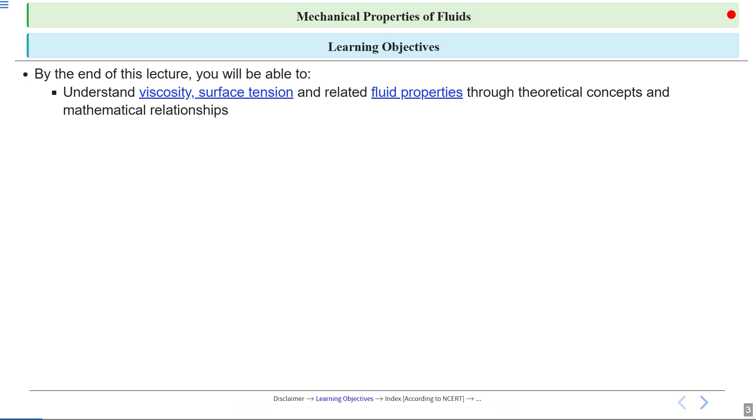Learning objectives. By the end of this lecture, you will be able to understand viscosity, surface tension, and related fluid properties through theoretical concepts and mathematical relationships, and apply principles of fluid mechanics to analyze real world examples like capillary action, droplet formation, and fluid flow in pipes.

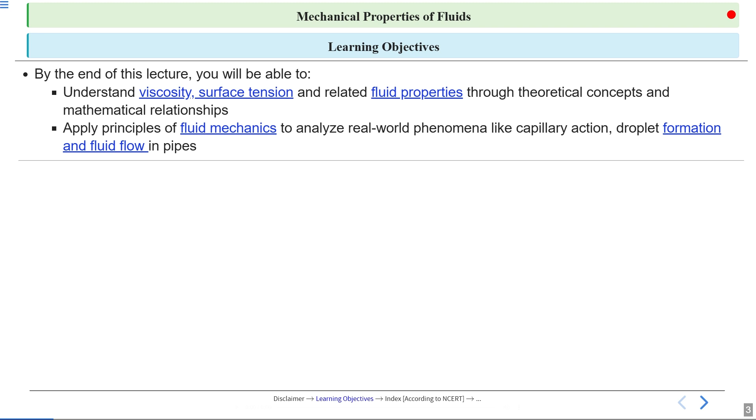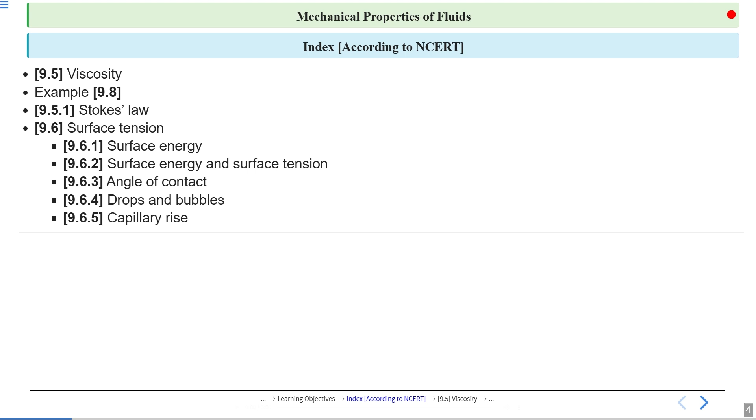So students, in today's lecture, we will cover first 9.5 viscosity, then example 9.8, then 9.5.1 Stokes law, then 9.6 surface tension, 9.6.1 surface energy, then surface energy and surface tension, then 9.6.3 angle of contact, then 9.6.4 drops and bubbles, and last 9.6.5 capillary rise.

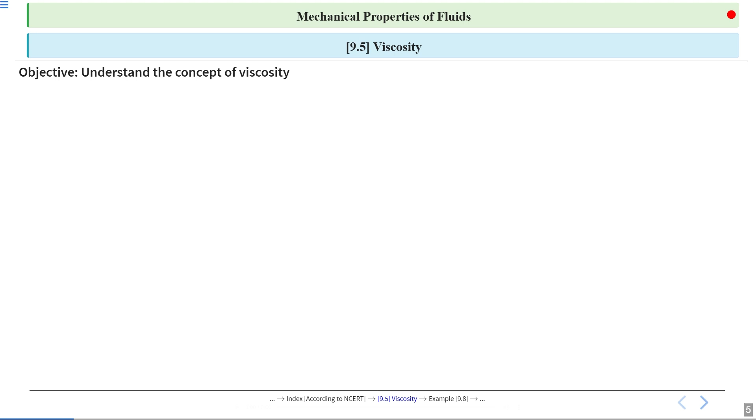So students, let's start with viscosity. Viscosity is a fundamental property of fluids that measures their resistance to flow. Viscosity arises when there is relative motion between layers of fluid.

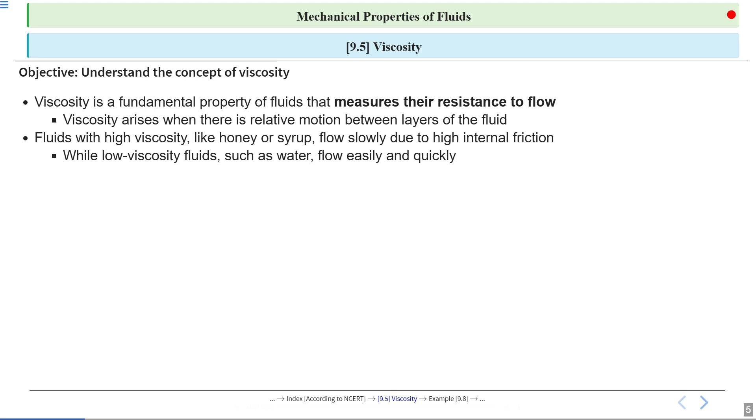It means viscosity measures a fluid's resistance to flow, arising when there is relative motion between layers of fluids. Fluids with high viscosity like honey or syrup flow slowly due to high internal friction, while low viscosity fluids such as water flow easily and quickly. This internal friction arises from the fluid's molecular structure and how its layers move relative to each other when subjected to stress.

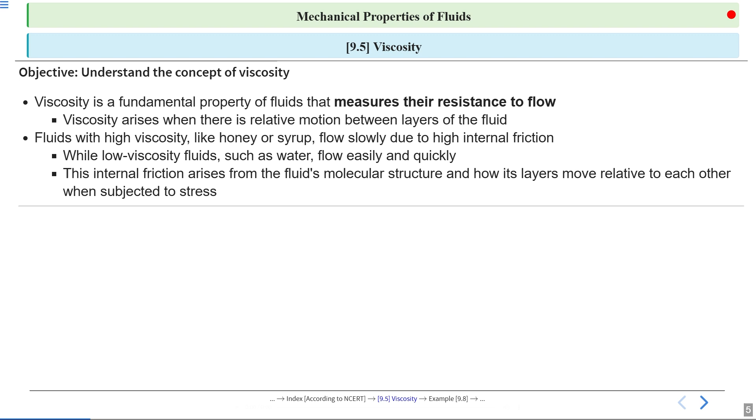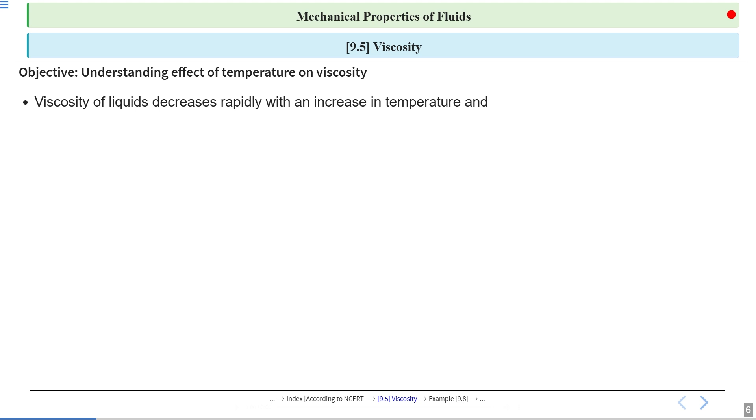Students, now we are going to focus on how temperature affects the viscosity of fluids. We know viscosity is a measure of how much a fluid resists flowing. First, viscosity of liquids decreases rapidly with an increase in temperature. This means that when you heat a liquid like warming up honey, it flows much more easily. The molecules move faster and can slide past each other more easily, so the liquid becomes less thick.

Viscosity of gases increases with an increase in temperature. As gas molecules move faster, they collide more often, which increases the internal friction and makes the gas slightly more resistant to flow. For example, warm air is just a bit more viscous than cold air. So, heating a liquid makes it flow more easily, but heating a gas makes it flow a bit more slowly. This difference is important in real world situations like engine oils or airflow in ventilation systems. Remember, temperature affects liquids and gases in opposite ways when it comes to viscosity.

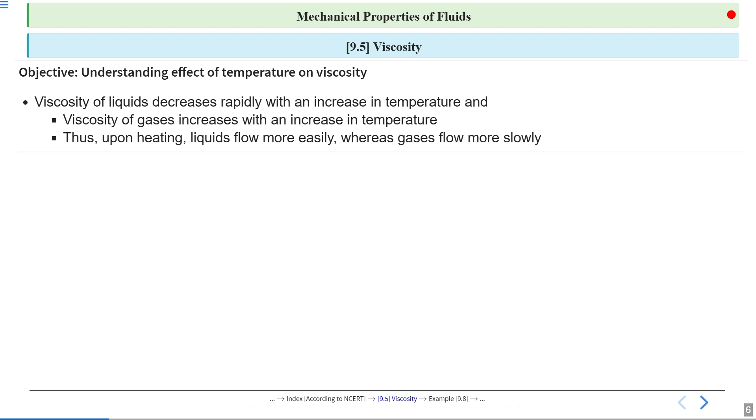Now we will discuss how viscosity affects fluid flow and behavior. Let's consider a simple setup. Imagine a layer of oil trapped between two glass plates, as shown in figure 9.12. A layer of liquid sandwiched between two parallel glass plates, in which the lower plate is fixed and the upper one is moving to the right with velocity v.

So the lower plate is fixed in place, while the upper plate can move. This setup helps us visualize how the fluid behaves when a force is applied. Here, the oil is sandwiched between the plates. This is a classic way to study viscosity.

Now, focus on what happens when we move the top plate to the right at a constant speed, while the bottom plate still stays still. The oil in contact with the moving plate tries to move along with it, while the oil near the fixed plate stays put. This creates a velocity difference within the fluid, which is exactly what viscosity acts to resist.

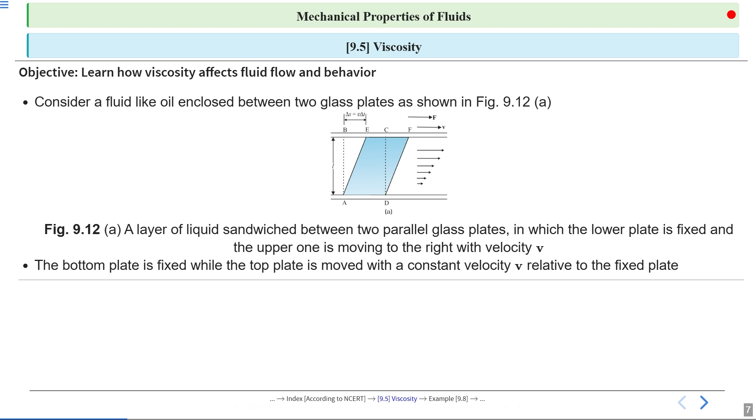So, imagine you have a plate moving over a layer of oil and then you replace the oil with honey. You will notice that you need to push much harder to move the plate at the same speed when using honey. This is a direct observation of how different fluids resist motion.

So this tells us that honey is more viscous than oil. In other words, honey has a higher viscosity, which means it resists flow more strongly. Viscosity is a key property that determines how thick or sticky a fluid feels when you try to move something through it.

So the fluid that touches a surface actually moves at the same speed as that surface. This is called the no slip condition. For example, if the bottom surface is fixed, the fluid touching it does not move at all, while the fluid touching a moving plate moves with the plate.

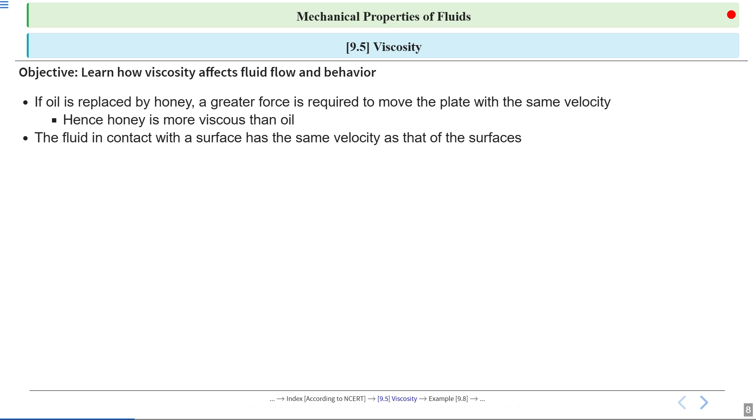So the layer of liquid in contact with the top moving surface travels at a velocity v, while the layer touching the fixed bottom surface stays still. This creates a gradient of velocities from the bottom to the top. It's important to remember that the velocity changes smoothly from one layer to the next.

If we look at all the layers in between, their velocity increases evenly from 0 at the bottom to v at the top. This means each layer moves a bit faster than the one below it. This gradual change in velocity across the fluid is a key feature of viscous flow.

For any layer of fluid, the layer above it tries to drag it forward, while the layer below tries to slow it down. This tug of war between layers creates an internal friction or viscous force within the fluid. It's this internal friction that we measure as viscosity.

This internal friction results in a force between the layers. The upper layer pulls the lower one forward and the lower layer pulls the upper one back. This is why moving one layer affects the motion of the others, and why more viscous fluids are harder to move. This type of flow is known as laminar.

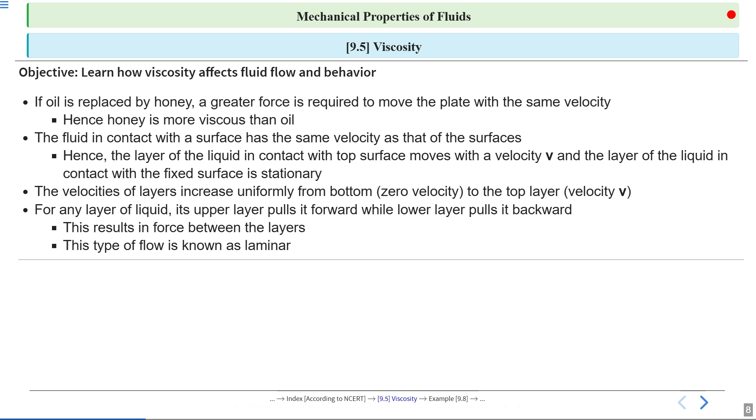Now, coefficient of viscosity. Let's start by defining the coefficient of viscosity. It's often represented by the Greek letter eta. The coefficient of viscosity is the ratio of the shearing stress applied to a fluid to the rate at which the fluid is deformed, or the strain rate. In simple terms, it tells us how much force is needed to make a fluid flow at a certain rate.

Now, eta equal to, mathematically, force upon area divided by velocity upon L, which is equal to, when rearranging the terms, eta equal to FL divided by VA. And if we talk about the SI units, so it will be...

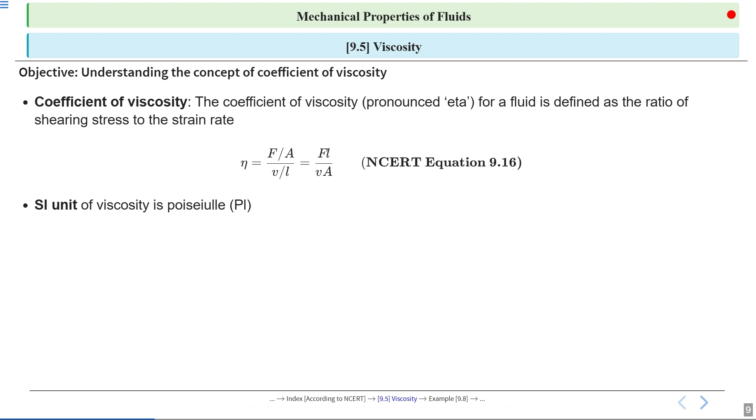This unit is not commonly used in everyday situations, but it's important to know for scientific work. Its other unit is Pascal second. These are equivalent ways to express viscosity in SI systems.

Dimensional formula: M L inverse T inverse. This tells us how viscosity relates to the fundamental physical quantities of mass, length, and time. Understanding dimensions helps us check if our equations make sense and can be useful for unit conversions.

Generally, thin liquids like water, alcohol, etc. are less viscous than thick liquids like coal tar, blood, glycerine, etc. This difference is why honey pours slowly while water pours quickly.

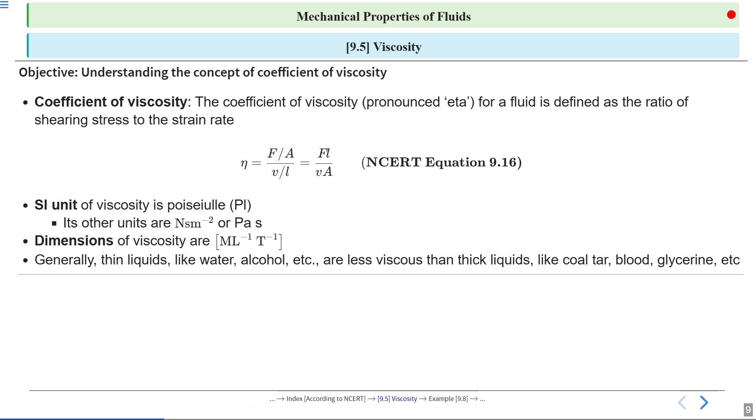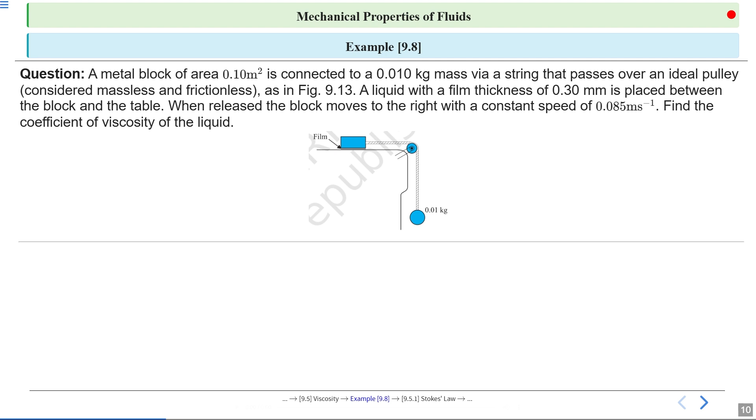Example 9.8. A metal block of area 0.10 meter square is connected to a 0.010 kg mass via a string that passes over an ideal pulley, considered massless and frictionless, as shown in the figure. A liquid with a film thickness of 0.30 mm is placed between the block and the table. When released, the block moves to the right with a constant speed of 0.085 meter per second. Find the coefficient of viscosity of the liquid.

Alright, let's see the solution. Let's start by listing all the information given in the problem.

Area of metal block A equal to 0.10 meter square. Mass connected to string M equal to 0.010 kg. Film thickness H equal to 0.30 mm, which is equal to 3.0 into 10 raised to the power minus 4 meter. Constant velocity V equal to 0.085 meter per second. Acceleration due to gravity 9.8 meter per second square.

Now, first let's think about why the block moves to the right. It's because the tension in the string caused by the hanging mass pulls the block. This tension is what initiates the motion, and since the block moves at a constant speed, the forces must be balanced.

So the tension, which we call T, is equal in magnitude to the weight of the hanging mass. Remember, weight is just mass times acceleration due to gravity. So T equal to M into G. Thus, the shear force F equal to T is equal to mg.

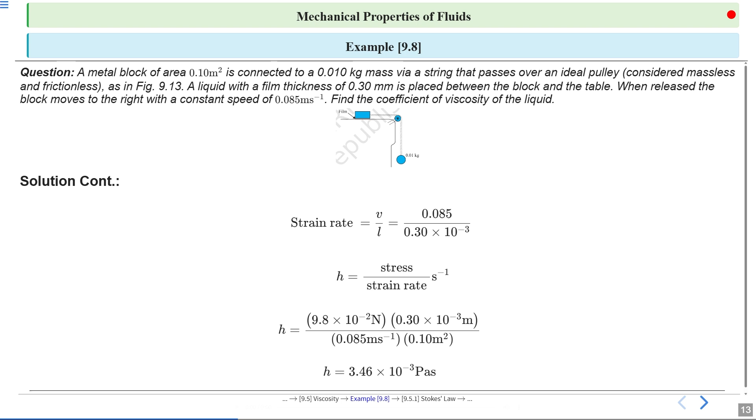Now let's look at Stokes' law. This law tells us about the viscous drag force, which is the resistance a small round object feels when moving through a thick fluid. This drag force depends on three things: the radius of the sphere, the viscosity of the fluid, and how fast the sphere is moving.

Think of how it's harder to move your hand quickly through honey than through water. Mathematically, F equals 6 pi eta a V. Viscous drag force F depends on fluid viscosity eta and sphere radius a.

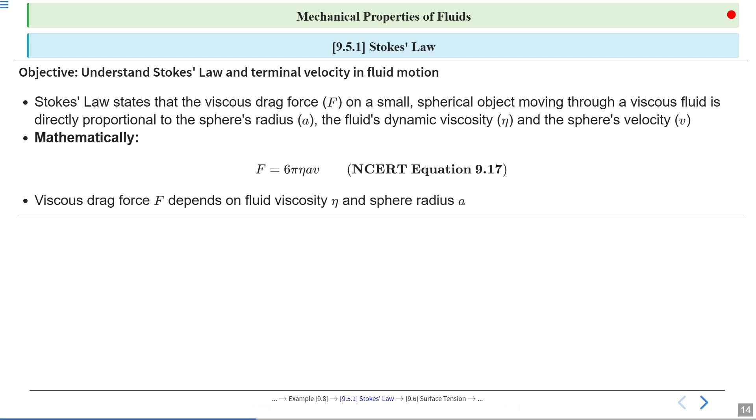Now let's consider a falling raindrop. This is a great real world example to visualize how forces act on an object moving through a fluid like air. At first, the raindrop accelerates downwards due to gravity, pulling it towards the earth, just like any other object in free fall. This initial acceleration is similar to dropping a stone from a height.

Velocity increase leads to increased retarding force. This force is called viscous drag, and it increases as the velocity of the raindrop increases. When viscous force plus buoyant force equals gravitational force, acceleration becomes zero. When this balance is reached, the raindrop moves at a constant speed called terminal velocity, meaning it continues to fall but its speed does not increase further. Terminal velocity is important because it explains why raindrops don't become dangerous projectiles as they fall.

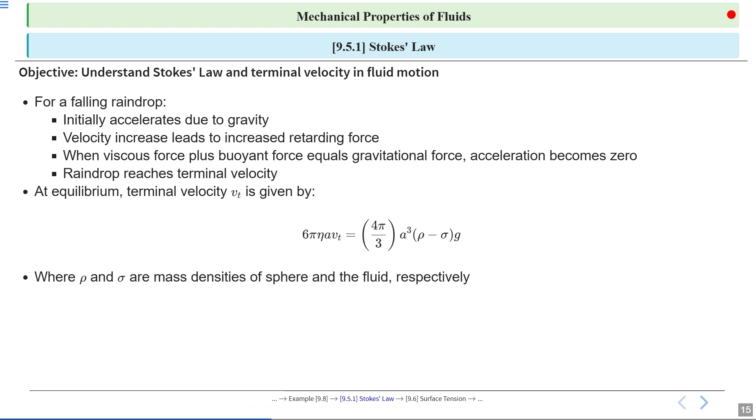At equilibrium, we can calculate the terminal velocity using a specific formula: 6 pi eta a Vt equals 4 pi divided by 3, a cube, into (rho minus sigma) into g, where rho and sigma are the mass densities of the sphere and the fluid respectively. So Vt equals 2 a square into (rho minus sigma) into g, divided by 9 eta.

Terminal velocity depends on: first, the square of the sphere's radius; inversely on fluid viscosity; and the difference in densities between the sphere and the fluid.

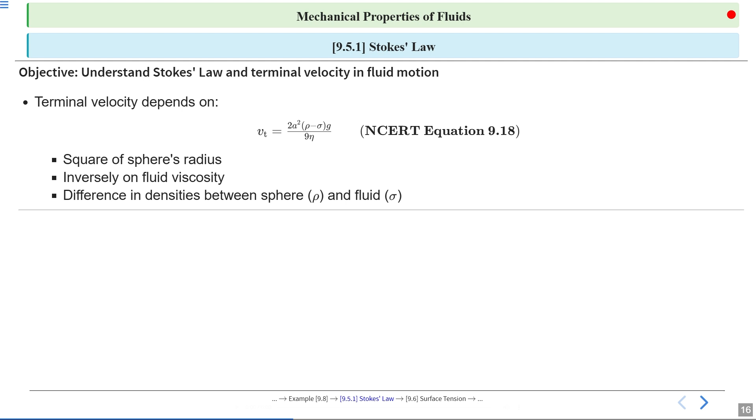So, definition of surface tension. Let's define what surface tension actually is. This is an important term in fluid mechanics, and understanding its definition will help us see why liquids behave the way they do at their surfaces.

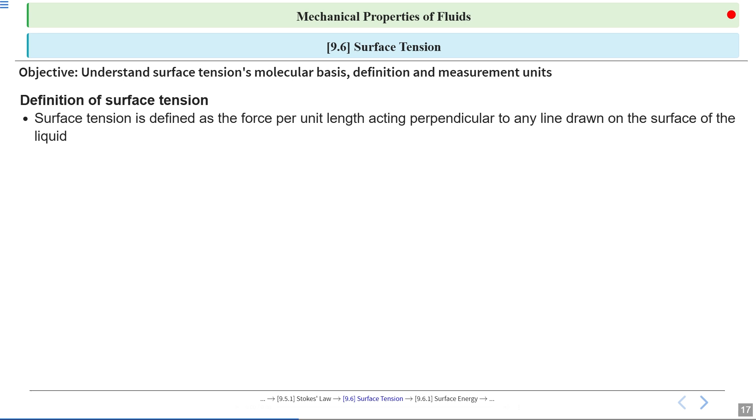Surface tension is defined as the force per unit length acting perpendicular to any line drawn on the surface of a liquid. In other words, if you imagine drawing a line on the surface, surface tension is the force that acts at right angles to that line, trying to minimize the surface. This is why water beads up on a surface.

We can express surface tension with the simple formula gamma equals F by L, where gamma is surface tension, F is the force acting on the length L, and L is the length of the line on the surface. The SI unit is Newton per meter, or joule per meter square.

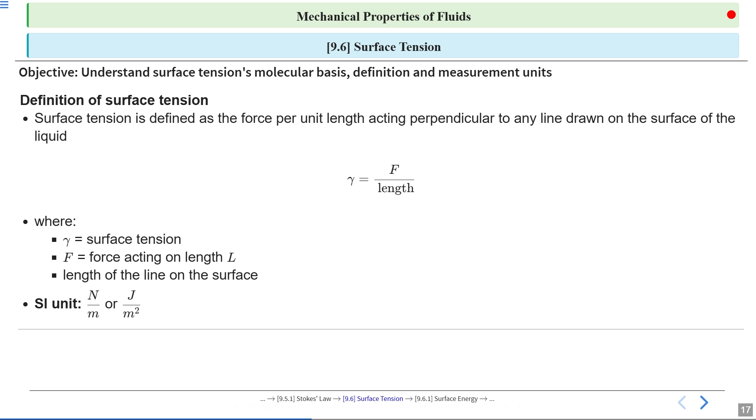Now, surface energy. Let's define surface energy. Surface energy is the extra potential energy that molecules have at the surface of a liquid compared to those inside the liquid. This happens because molecules at the surface are not surrounded by other liquid molecules on all sides, so they experience different forces. In simple terms, surface energy is the energy needed to create a new surface by breaking the bonds between molecules.

Surface energy is the work done per unit area to increase the surface area of a liquid. For example, if you stretch a soap film, you have to do work to make it larger, and that work per square meter is the surface energy.

Materials with high surface energy are easily wetted, like water, while those with low surface energy, such as hydrocarbons, cause liquids to bead up, creating characteristic non-stick surfaces. This explains why water forms droplets on a waxed car but spreads out on a clean glass.

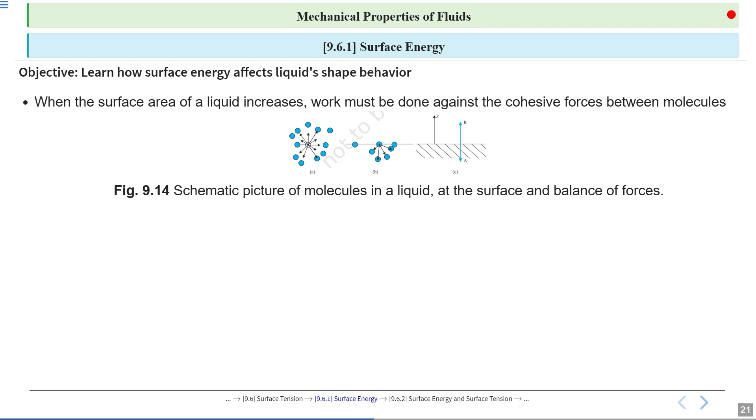Take a look at diagram 9.14, a schematic picture of molecules in a liquid at the surface and balance of the forces. Inside the liquid, molecules are pulled equally in all directions, but at the surface the forces are unbalanced. This is why surface molecules behave differently.

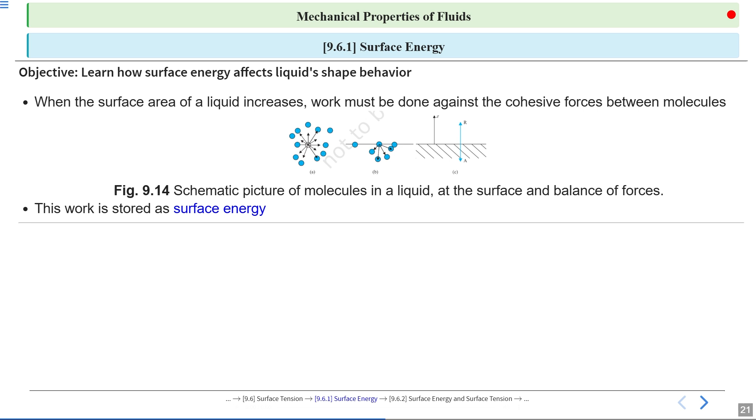Think about how water forms droplets on a leaf—this is due to these surface forces. The work we do to increase the surface area does not just disappear; it gets stored as surface energy. Surface energy is the extra energy that surface molecules have compared to those inside the liquid. This explains why liquids tend to minimize their surface area, forming shapes like spheres.

9.6.2 Surface energy and surface tension.

When we stretch the film, its surface area increases. This means we have added energy to the system, because it takes work to increase the area against the internal forces holding the molecules together. Think of it like stretching a rubber band—it resists being stretched, and you have to do work to pull it apart.

Let this internal force be F. The work done by the applied force is F dot D, which equals F D. From conservation of energy, this is stored as additional energy in the film.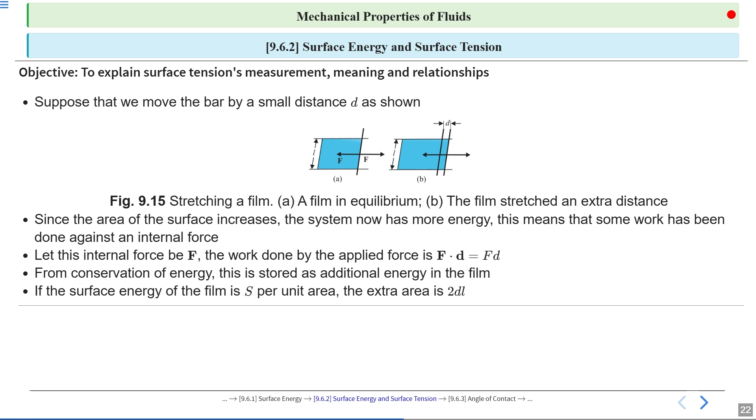If the surface energy per unit area is S, and the extra area created is 2 times D times L, where L is the length of the bar, then the total extra energy is S into 2dl.

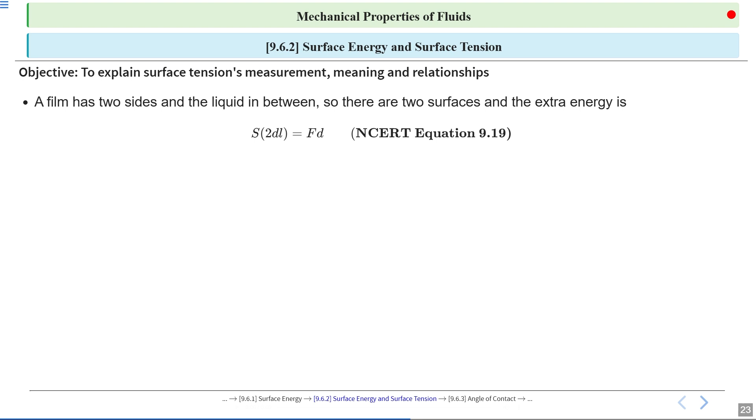A film has two sides with liquid in between, so there are two surfaces, and the extra energy is S into 2dl, which equals Fd. So S equals Fd divided by 2dl, which equals F by 2l.

This quantity S is the magnitude of surface tension. It is equal to the surface energy per unit area of the liquid interface, and is also equal to the force per unit length exerted by the fluid on the movable bar.

The relationship between surface energy and surface tension gives deep insight into the molecular behavior at the surface of liquids. Understanding this connection helps explain why surface phenomena like the formation of droplets or bubbles occur.

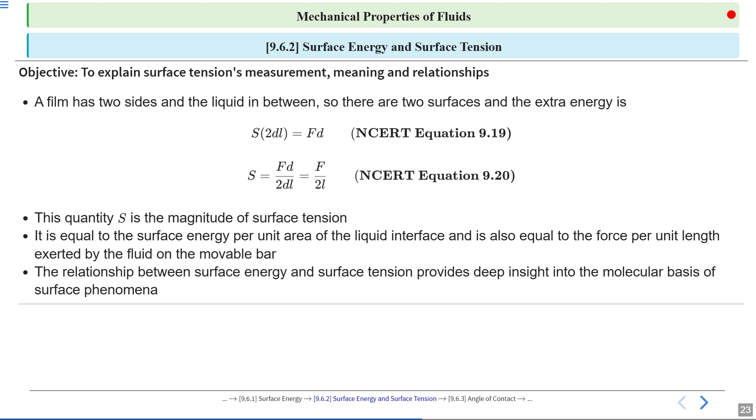Now let's look at how a fluid interacts with a solid surface. A fluid will stick to a solid if the energy needed to keep the fluid and solid together is less than the combined energies of the solid with air and the fluid with air. In simple terms, if the fluid likes the solid more than being next to air, it will spread out and stick to the solid.

This means there is an attraction between the solid surface and the liquid. For example, water tends to climb up clean glasses because the attraction between water molecules and glass is strong. This attraction is what leads to phenomena like capillary action.

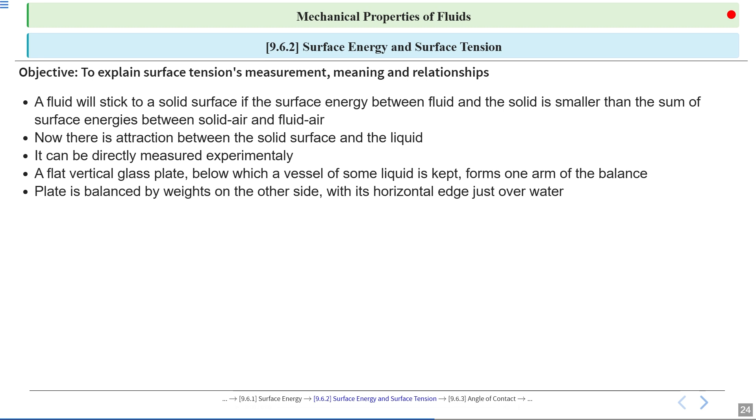It can be directly measured experimentally. A flat vertical glass plate, below which a vessel of liquid is kept, forms one arm of the balance. The plate is balanced by weights on the other side, with its horizontal edge just over the water. We slowly raise the vessel until the liquid just touches the glass plate.

Surface tension pulls the plate down slightly. This pull is due to the cohesive forces at the liquid's surface, and it's what we are aiming to measure. Weights are added until the plate just clears the water.

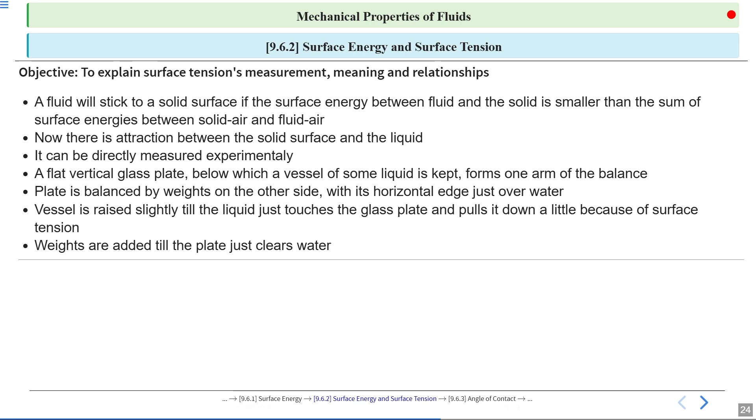Now let's talk about how we actually calculate the surface tension from this experiment. The surface tension at the liquid-air interface is what we are interested in. We will use the measurements from our setup to find its value.

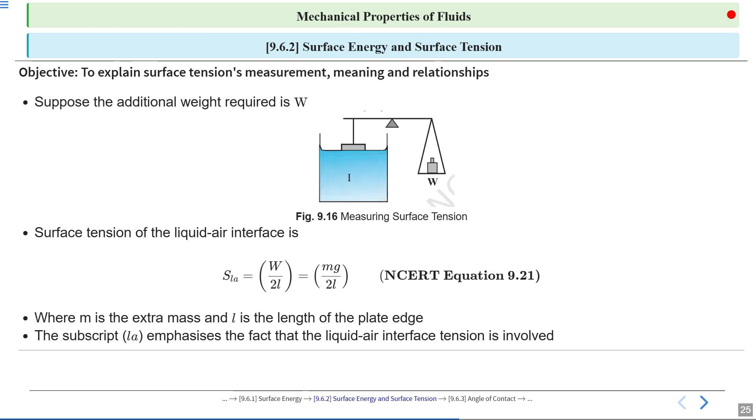The formula for surface tension in this case is S equals W divided by 2l, equals mg divided by 2l, where m is the extra mass and L is the length of the plate. The subscript LA emphasizes that the liquid-air interface tension is involved. This distinction is important because surface tension can be different at different interfaces.

9.6.3, Angle of contact. First, let's look at the definition. The contact angle is a specific angle formed at the point where the liquid surface meets a solid surface. It's important to know exactly what this angle represents before we discuss its effect.

The angle of contact is the angle between the tangent to the liquid surface and the solid surface, and we always measure it through the liquid. For example, if you imagine a drop of water sitting on a leaf, the angle is measured inside the water at the point where it touches the leaf. This angle helps us understand how much the liquid wets the surface.

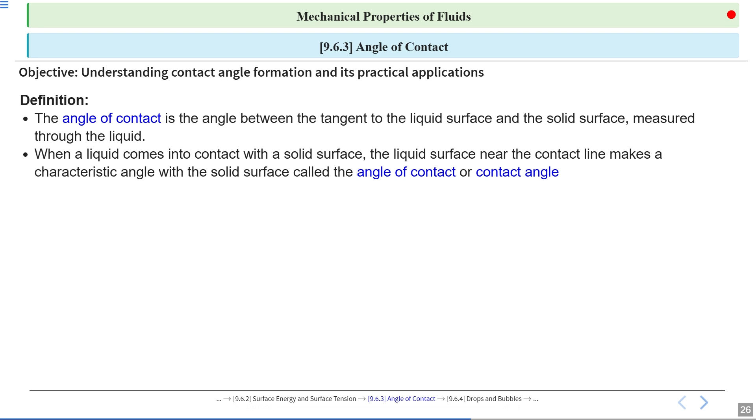When a liquid touches a solid, the surface of the liquid near the edge forms a characteristic angle with the solid. This is called the contact angle or angle of contact. The size of this angle tells us whether the liquid will spread out or form droplets. A small contact angle means the liquid spreads, while a large angle means it forms beads or droplets.

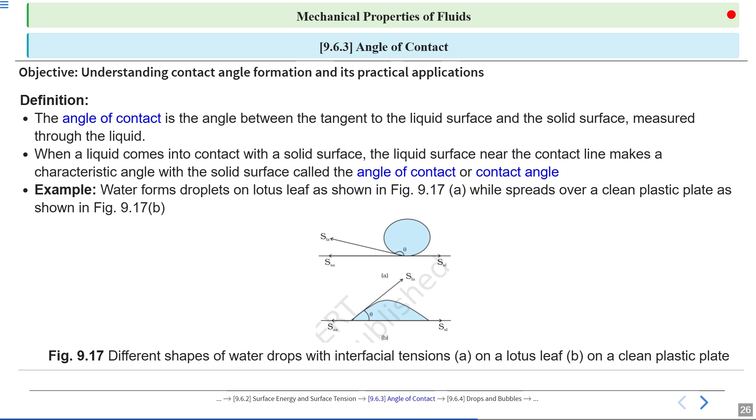Now let's look at the three interfacial tensions involved: liquid-air, solid-air, and solid-liquid. These are represented as S_LA, S_SA, and S_SL.

Interfacial tension is the force per unit length acting along the line where two phases meet, measured in Newton per meter.

Look at figure 9.17. Notice how the shape of the water drop changes depending on the surface, like a lotus leaf versus a plastic plate. This difference is due to how these tensions balance out. For example, if the liquid-air tension is much higher than the solid-liquid tension, the drop will bead up more, like on the lotus leaf. This concept helps explain why some surfaces are water repellent while others are not.

Now, at the line of contact, the surface forces between the three media must be in equilibrium. From figure 9.17b, the following relationship is easily derived: SSL plus SLA cos theta is equal to SSA. The angle of contact is an obtuse angle if SSA is greater than SLA, as in the case of the water-leaf interface, while it is an acute angle if SSL is less than SLA, as in the case of the water-plastic interface.

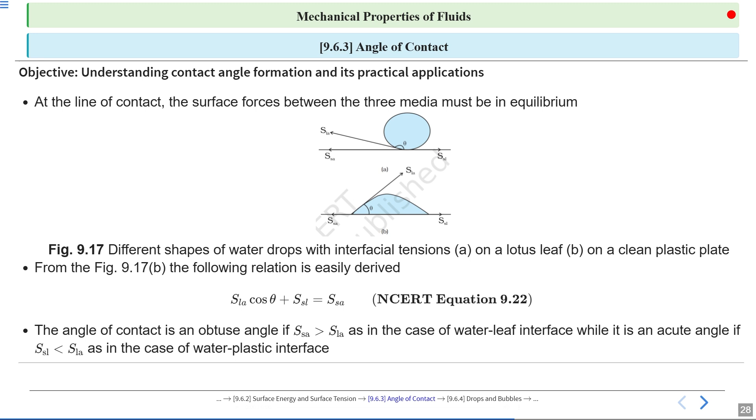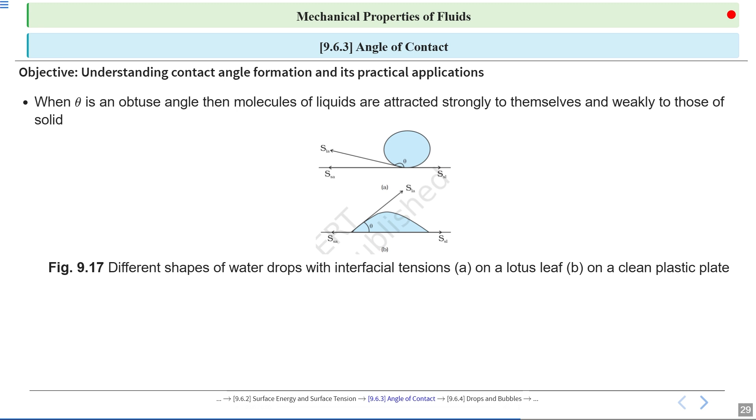Now, when theta is an obtuse angle, then molecules of the liquid are attracted strongly to themselves and weakly to those of the solid. It costs a lot of energy to create a liquid-solid surface, and the liquid then does not wet the solid. This is what happens with water on a waxy or oily surface and with mercury on any surface.

Now let's look at what happens when the molecules of the liquid are strongly attracted to the molecules of the solid. This strong attraction lowers the solid-liquid surface tension, which we call SSL. When SSL goes down, the value of cos theta increases, so the contact angle theta gets smaller.

So on the lotus leaf, water forms a bead with a large angle, but on the plastic plate, the drop spreads out more, showing a smaller angle. This difference is all about how the liquid and solid interact at the molecular level.

In this situation, the contact angle theta is an acute angle, meaning it is less than 90 degrees. This tells us that the liquid is wetting the surface well. For example, water on clean glass or plastic forms a small angle and spreads out, showing strong attraction between the liquid and the surface.

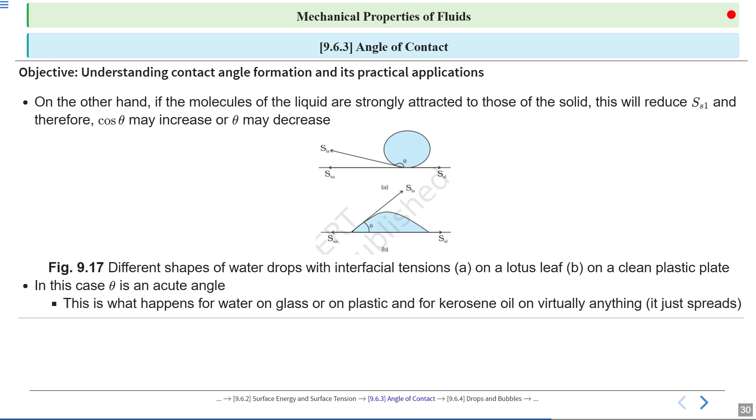Now, soap, detergents, and dyeing substances are wetting agents.

So look at the figure. Water forms different shapes on the lotus leaf and the plastic plate. The shape of the drop depends on the contact angle, which is influenced by the interfacial tensions between the liquid, solid, and air. On the lotus leaf, the water beads up, showing a large contact angle, while on the plastic plate, it spreads more, showing a smaller angle.

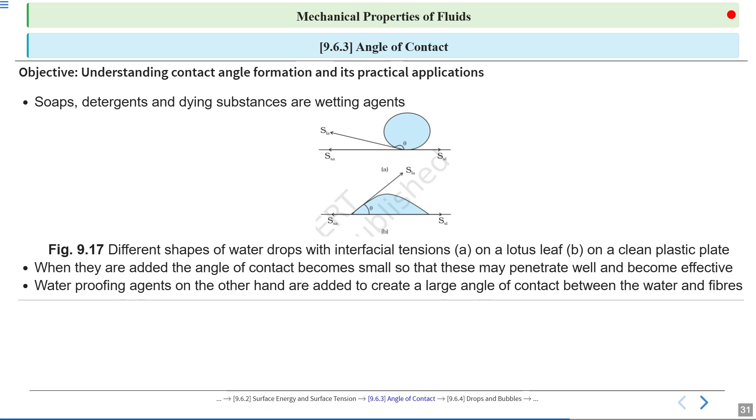When wetting agents are added, the angle of contact becomes small so that they may penetrate well and become effective. Waterproofing agents, on the other hand, are added to create a large angle of contact between the water and the fibers.

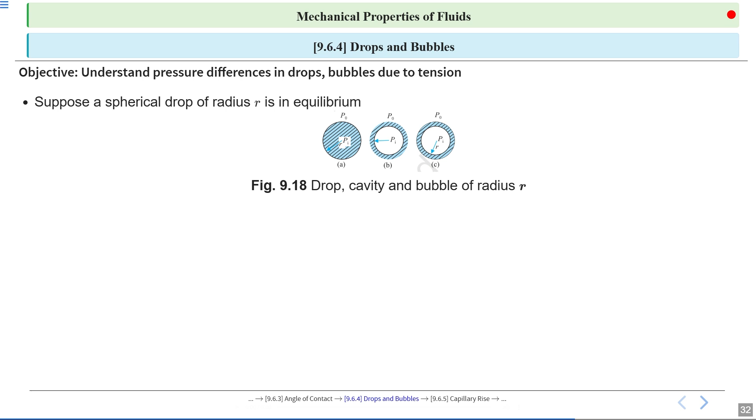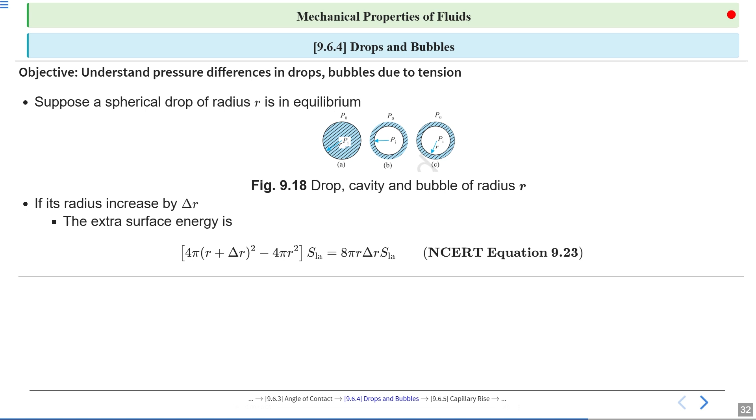If its radius increased by delta r, the extra energy is 4 pi into (r plus delta r) whole square minus 4 pi r square, into SLA, which is equal to 8 pi r into delta r into SLA.

Now, if the drop is in equilibrium, this energy cost is balanced by the energy gain due to expansion under the pressure difference Pi minus P naught between the inside of the bubble and the outside. Work done is W equal to (Pi minus P naught) into 4 pi r square into delta r. So Pi minus P naught is equal to 2 into SLA divided by r.

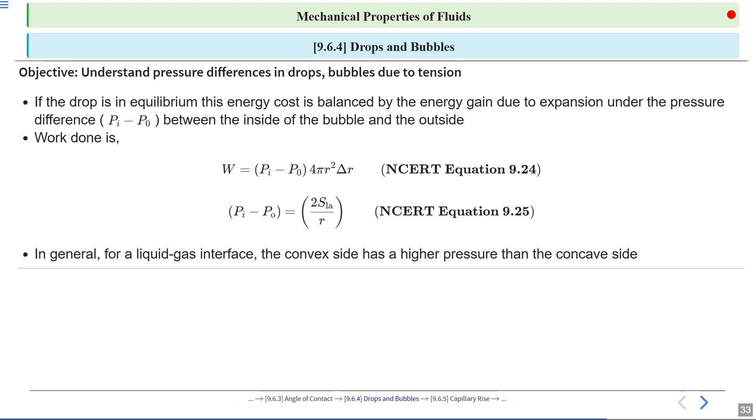In general, for a liquid-gas interface, the convex side has a higher pressure than the concave side. Remember, surface tension always tries to minimize the surface area, leading to these pressure differences.

Example: an air bubble in a liquid would have higher pressure inside it. Look at figure 9.18b - drop, cavity and bubble of radius r. A bubble in figure 9.18c differs from a drop and cavity in that it has two interfaces. Applying the above argument, we have for a bubble: Pi minus P naught equals 4 times SLA divided by T.

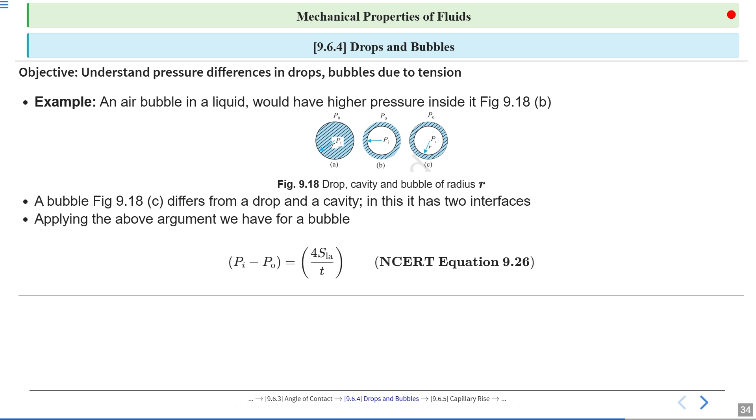9.6.5 Capillary rise. Let's examine a vertical capillary tube with a circular cross section and radius A that we insert into an open vessel of water. This setup is important because the narrowness of the tube allows us to clearly observe the effects of surface tension.

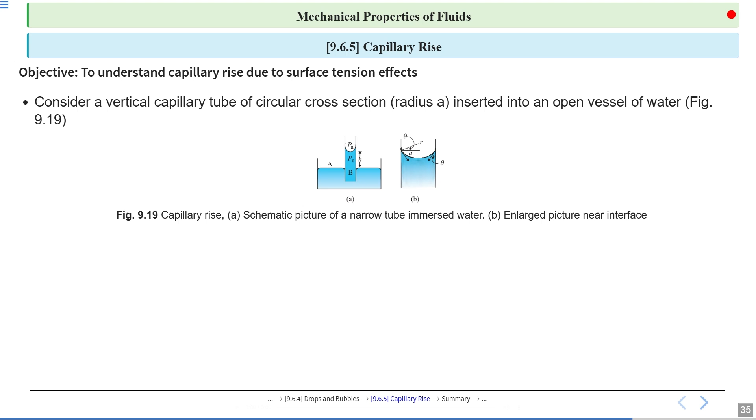Look at figure 9.19: capillary rise - a schematic picture of a narrow tube immersed in water, and an enlarged picture of the interface. The angle of contact between water and glass is acute, so the surface of the water in the capillary is concave. This concave shape is a direct result of the adhesive forces between water and glass being stronger than the cohesive forces within the water itself. This curvature is what leads to the rise of water in the tube.

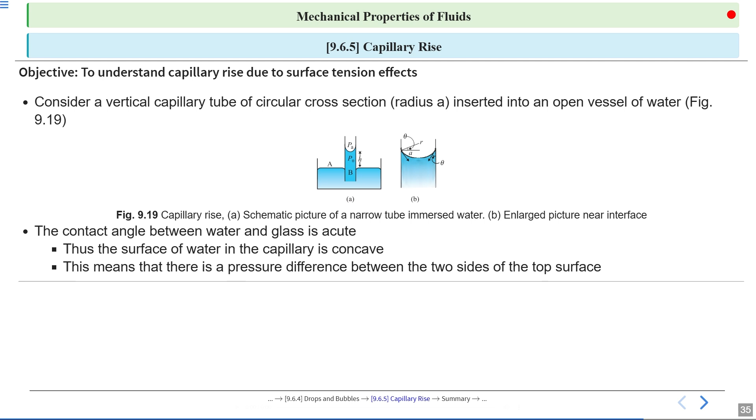This means there is a pressure difference between the two sides of the top surface. Looking at diagram 9.19, it shows a narrow tube or capillary dipped into water, where water climbs up inside the tube forming a curved surface called the meniscus. This happens because of the pressure difference between the inside and outside of the tube at the top surface, which is influenced by surface tension.

The formula for the pressure difference: Pi minus P naught equals 2S divided by R, equals 2S divided by A sec theta. So Pi minus P naught equals 2S divided by A cos theta. This thus shows that the pressure of the water inside the tube, just at the meniscus air-water interface, is less than the atmospheric pressure.

Now let's focus on figure 9.19. Here we have two points, A and B, inside a narrow tube that's been dipped into water. The water climbs up inside the tube forming a curved surface called a meniscus. This setup helps us analyze the forces and pressures involved in capillary rise.

At this stage, it's important to realize that points A and B, which are at the same horizontal level in the liquid, must be at the same pressure. So P naught plus H rho g equals Pi equals Pa, where rho is the density of water and H is called the capillary rise. Figure 9.19.

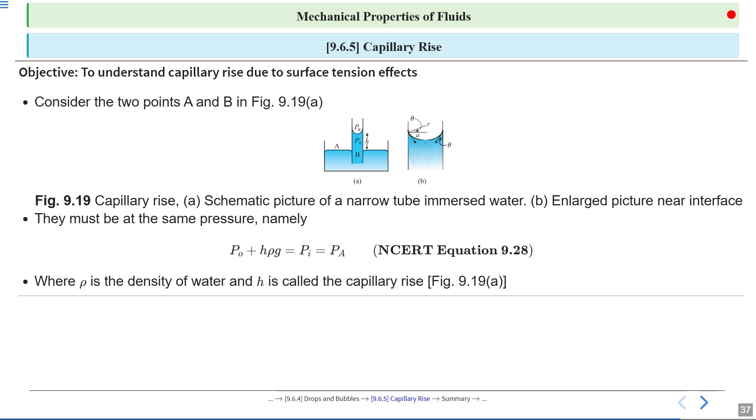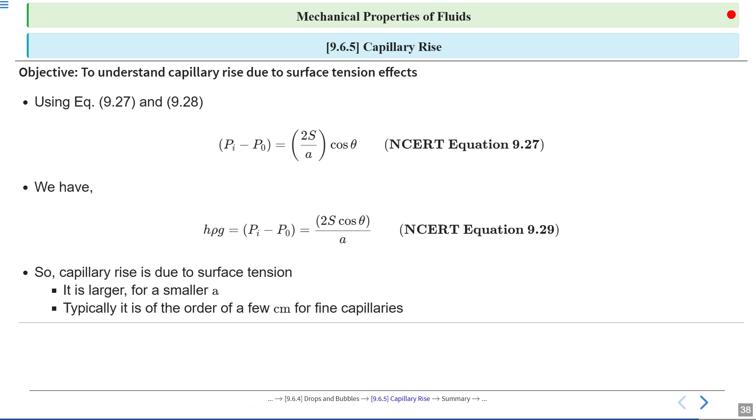Using equations 9.27 and 9.28, Pi minus P naught equals 2S by A cos theta. We have H rho g equals Pi minus P naught equals 2S cos theta divided by A. So capillary rise is due to surface tension. It is larger for smaller A, and typically it is of the order of a few centimeters for fine capillaries. This effect is crucial in many natural and technological processes, like how plants draw water from the soil.

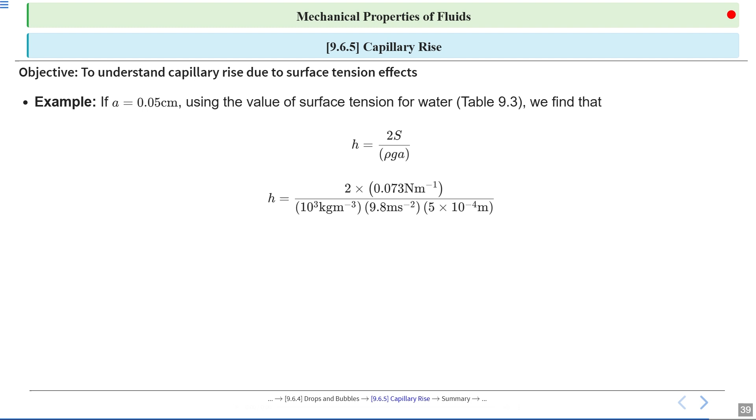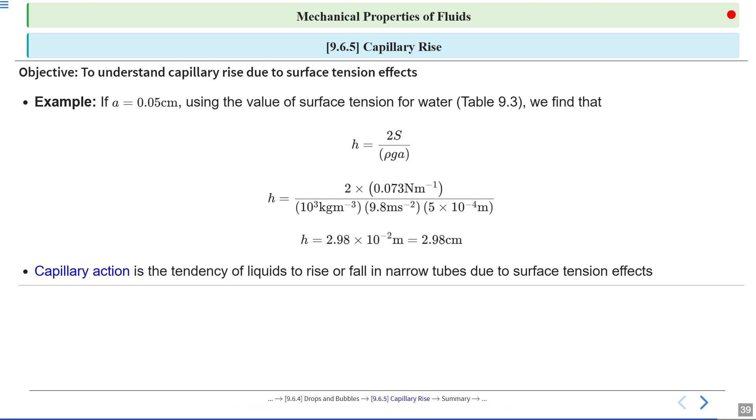Now, as an example: if A equals 0.05 centimeter, using the value of surface tension for water, we find that H equals 2S divided by rho g A. Substitute the values and you will get H equals 2.98 centimeters. Capillary action is the tendency of liquids to rise or fall in narrow tubes due to surface tension effects.

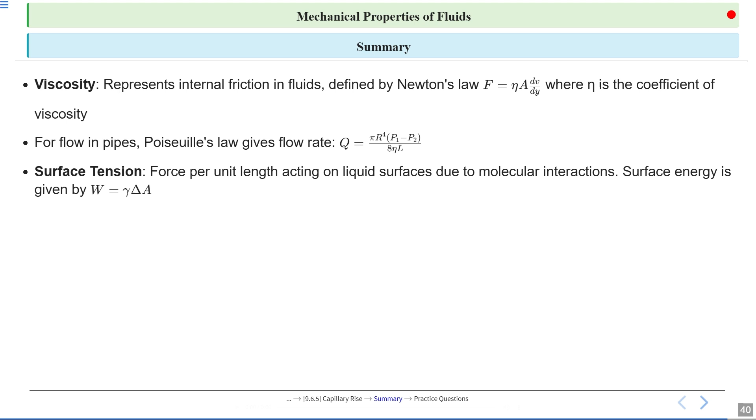Now let's summarize our lecture in some brief points. Viscosity represents internal friction in fluids, defined by Newton's law F equals eta A into dV upon dy, where eta is the coefficient of viscosity. For flow in pipes, the flow rate is pi r raised to the power 4, times P1 minus P2, divided by 8 eta L. Surface tension, force per unit length acting on the liquid surface, is due to molecular interactions, so surface energy is given by W equals gamma into delta A. Angle of contact is the angle between the liquid surface and solid surface, governed by Young's equation.